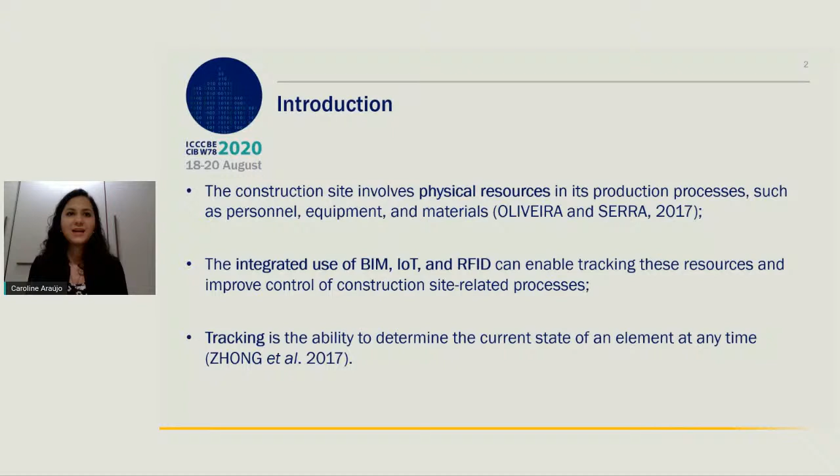The construction site involves a large number of physical resources in its production processes, such as personnel, equipment, and materials. The integrated use of BIM, IoT, and RFID technologies can enable tracking these resources and improve control at the construction site. Tracking is the ability to determine the current state of an element at any time.

Metallic formworks are relevant physical resources in the cast-in-place concrete wall constructive system, but after removal of the formworks, there are defect corrections that cause rework, delay, and quality issues. We can use technologies to control the integrity and service life of each metallic formwork and reduce these kinds of defects. So the main objective is to present a conceptual framework for tracking physical resources in construction sites using BIM, IoT, and RFID, in which the metallic formworks are the objects of study.

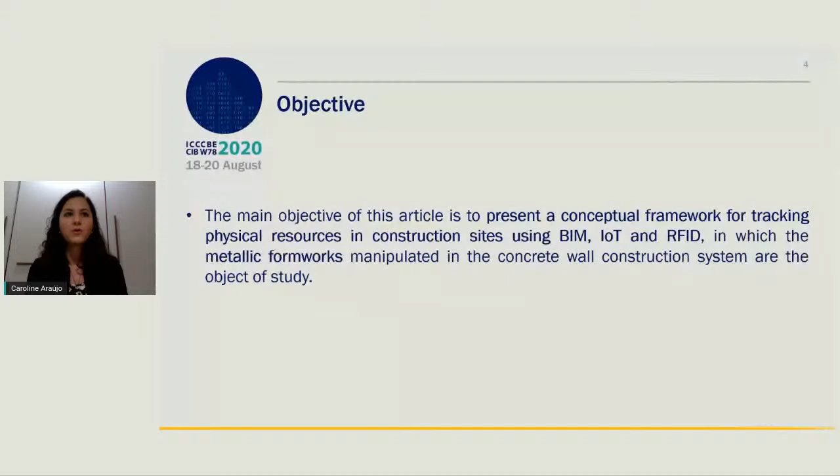This is based on the research problem: there was a lack of an integrated system for this kind of resource, a temporary resource in the construction phase.

About the technologies: Internet of Things allows communication between real and virtual devices and can detect status changes in real time. RFID is part of IoT and can identify and support a large number of unique IDs in the same environment, and the main components of RFID systems are tags, reader, and control software. About BIM, Building Information Modeling, it has the potential to become a digital twin of reality and support the tracking and monitoring of construction progress in real time, and also has cloud computing interface and other technologies.

So we did a systematic literature review to identify the main requirements to develop an integrated system with the mentioned technologies. We selected databases, defined inclusion criteria, and search terms that should be in the paper. We analyzed all available periods in the databases, just papers published in journals. For the review exclusion criteria, we excluded repeated papers and papers that didn't have BIM, IoT, and RFID as the main subject. We analyzed and discussed the results, and in the next slide I will show you the final sample.

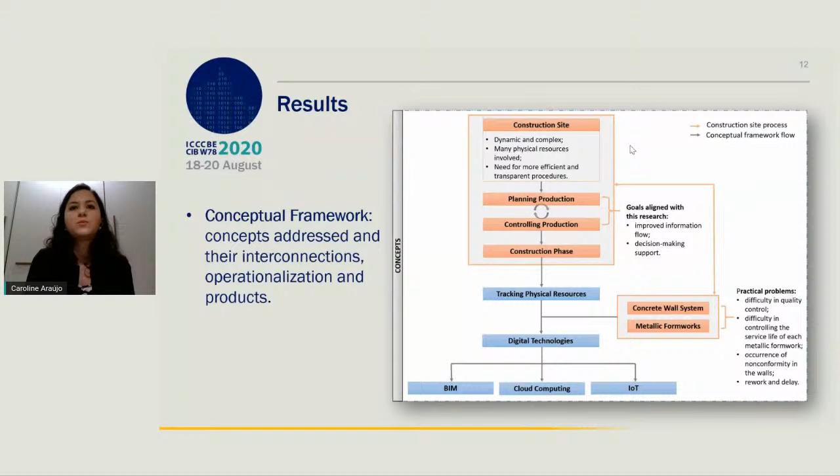Here is the first result, a conceptual framework with concepts addressed and their connections. So we have the construction site, planning and controlling production, specifically in the construction phase, and we have the concrete wall system and the metallic formwork with the practical problems. For tracking the resources, we will need the digital technologies that I mentioned.

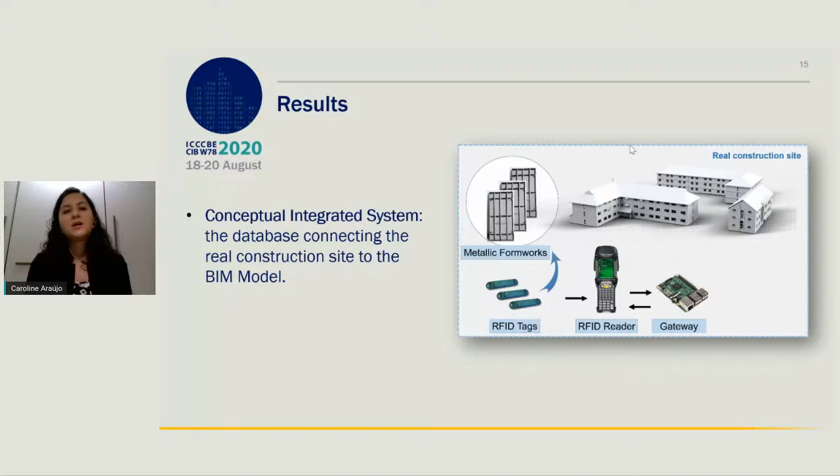There is the conceptual integrated system. So we have the real construction site. We need to put the RFID UHF tags in each metallic formwork and use the reader to capture the data, and the gateway to communicate with the reader.

and with the database, and also to generate a local network. So we have the database and we have the virtual construction site corresponding to the real construction site. The end user can use the reader and the integrated system inside a tablet, and the BIM model will be translated to the cloud to become a digital twin of the reality.

There are three modules of the system. The first module is the registration of tags and the respective formwork, and the type of information here is acquisition date, numeric identification codes, and physical aspects of the formworks, such as dimensions and weight.

The second one is the maintenance module, and it can register maintenance history records, service life forecasts, reports, and related photographic reports about this. The last module properly allows tracking and locating the formworks, and can provide support during the installation phase to verify and correct assembly problems.

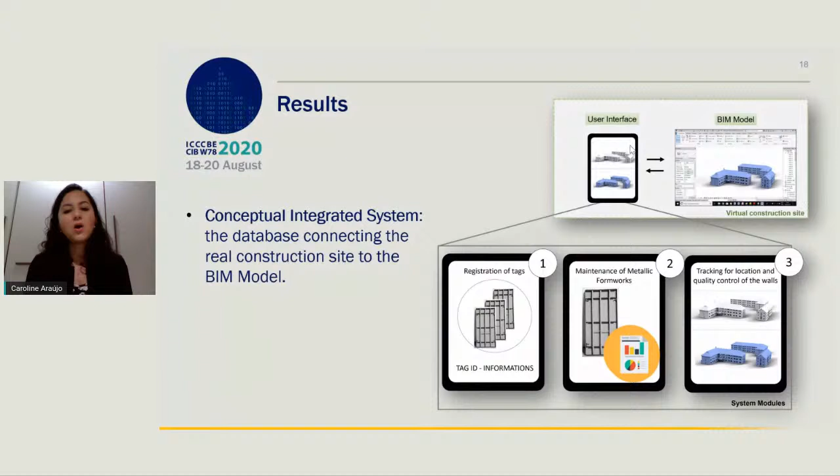But the main objective of this module is to compare the data collected about formworks with the quality of the wall generated using triangulation of all data.

There is a full view of the conceptual integrated system, and we are developing this in a real environment now with a construction company partner, applying this system based on this framework in a real environment.

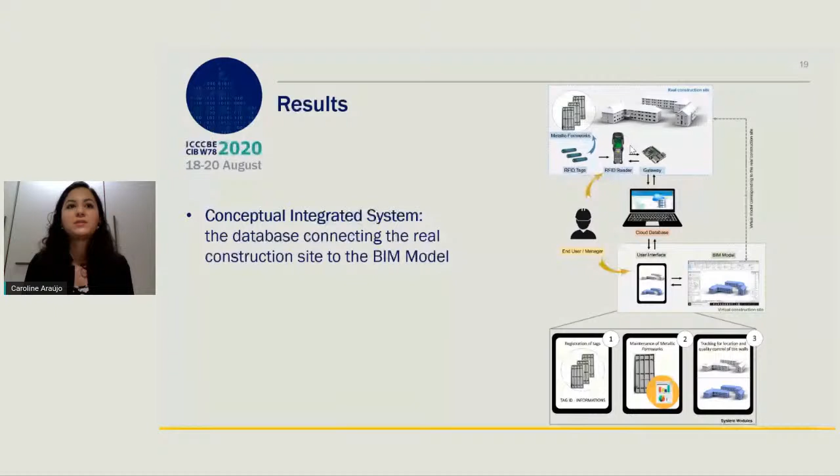The system can collect, store, manage, and display data on an integrated platform. And despite the challenge for practical implementation, the potential of integrated use of these technologies is remarkable. The system can improve the information flow on construction sites, management decision making, and promote improvement in management and quality control. Thanks for your attention.

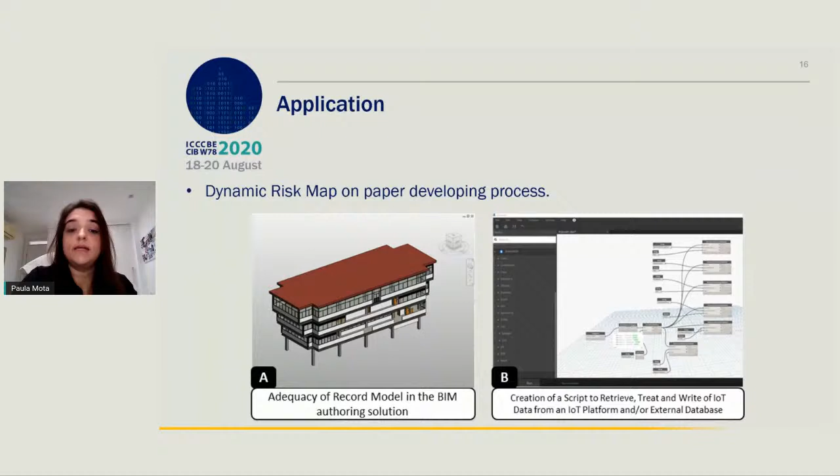For this prototype, an IoT platform database was used to record environmental data collected by a sensor network.

The adequacy of the BIM model involved the settings of shared parameters and inserting the symbolic risk object by room. The next goal was to synchronize the updated 3D view sets from the BIM author environment to the MR solution.

An MR solution is essential to share information, and the synchronizing can be user-based or through an automation program to achieve live status. The actual 3D view set with IoT and risk data was synchronized to be accessed by any mobile application.

As a result, the symbols were visualized at different scales and their IoT data consulted through the properties browser.

Regarding the degree of intensity, the higher the symbol, the greater the user risk. Besides, users can access quantitative risk information.

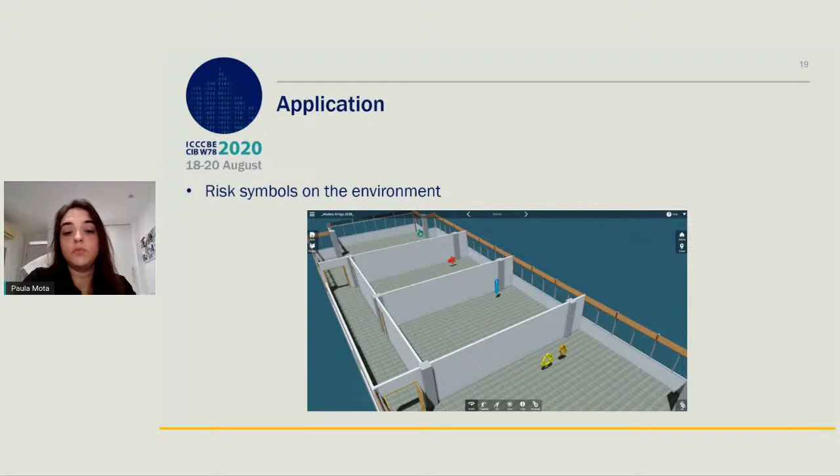So, as a conclusion, the framework developed will help the implementation of a dynamic risk map. The benefits include the knowledge of risk on site and the reduction of workplace injuries.

Future work aims at the implementation of AR sensor solutions and measuring their performance.

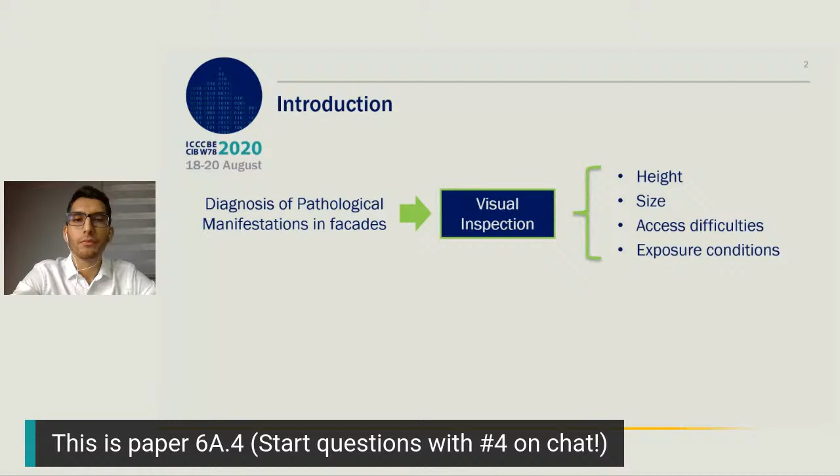In recent years, the use of deep learning techniques to detect and classify specific features in images and videos has been increasing, which when combined with the use of UAVs for collecting images, is a potential useful tool that can assist the visual inspection. This paper aimed to perform the analysis of digital image processing, DIP, for automatic detection of cracked building ceramic tiles associated with a UAV, which will potentially result in benefits like time, cost, and safety with respect to the diagnosis.

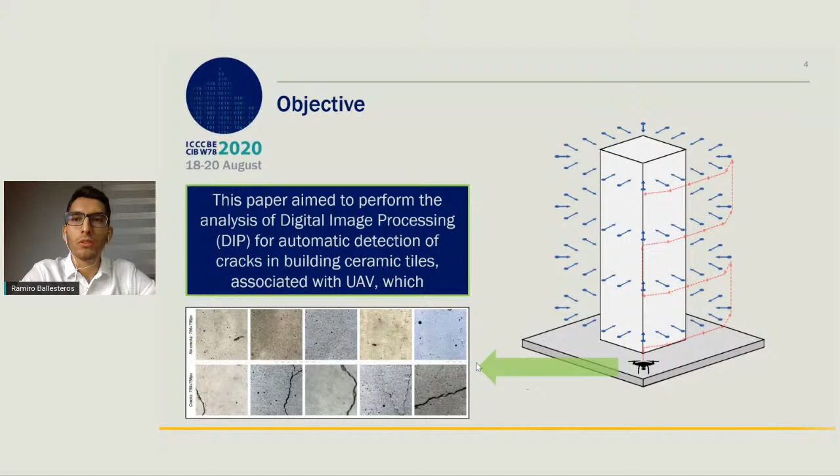For the project construction, it was necessary to separate the entire process into modules, starting with the creation of the dataset database. The data is pre-processed with DIP techniques, and finally, the deep learning training and testing stage.

With the lack of access to a public dataset for the given problem, it was necessary to create a small database, seeking to meet the minimum requirements of deep learning, even knowing that for good results, thousands of images will be needed for training.

In this way, 167 different images were collected, all showing cracks in ceramic tiles. Consecutively, the respective labels were created so that the deep learning interprets the pathological occurrence as a correct answer.

In the pre-processing step, the images were treated so that the result was as close to the labels as possible, that is, binarized, with a black background and white strokes. The binarization technique used was Otsu thresholding. Before performing it, it was necessary to apply some other techniques.

Involving lighting, morphology, and noise filters. This series of techniques made it possible to visualize the cracks in most of the images that previously presented problems.

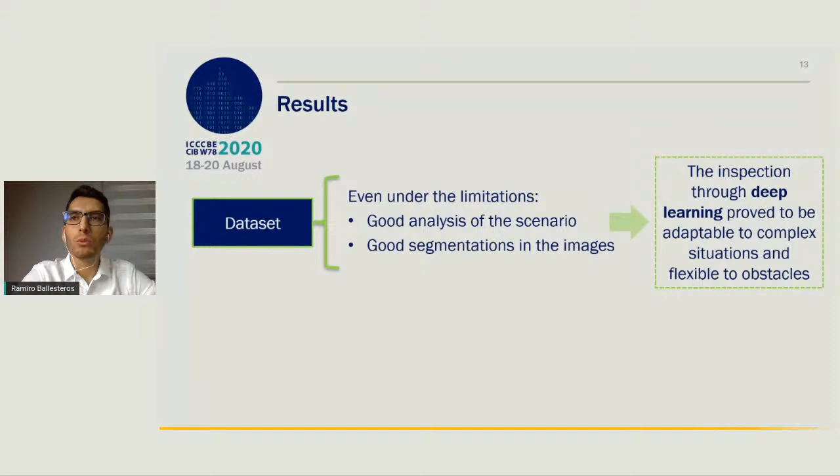The results of the study provided, even under the limitations, a good analysis of the scenario and good segmentation in the images, both images with a lot of noise, as well as those with discrete features. The inspection through deep learning proved to be adaptable to complex situations and flexible to obstacles.

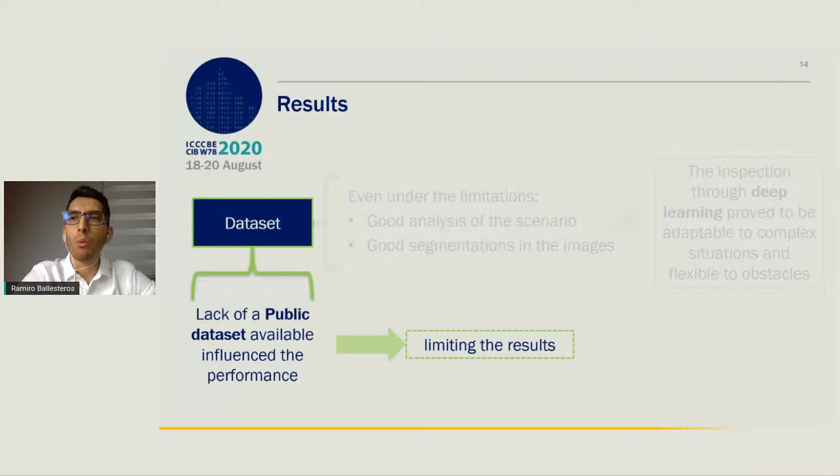However, the lack of a public dataset available for these types of problems directly influenced the performance of deep learning, limiting the results. It is important to emphasize the importance of a wide dataset to work with deep learning, with good quality and labeled images, in order to obtain better results.

Even after selecting the most relevant data to compose the dataset, in many cases there was great variation in the images, such as angulation, distance, and quality.

In addition, the preprocessing of the data also impacted some of the results, as it didn't work well on all the images in the dataset, mainly due to the variation in lighting.

The detection of cracks by DIP techniques is feasible from a technical point of view. However, it is considered a complex job when there is high variation in the study images and in a limiting scenario, such as the lack of a public dataset for the problem. The project still managed to develop a simple and efficient methodology for what was proposed.

There is a promising way to improve the project, seeking to further simplify the approach, minimizing the pre-processing step for example, and improve the accuracy of the results.

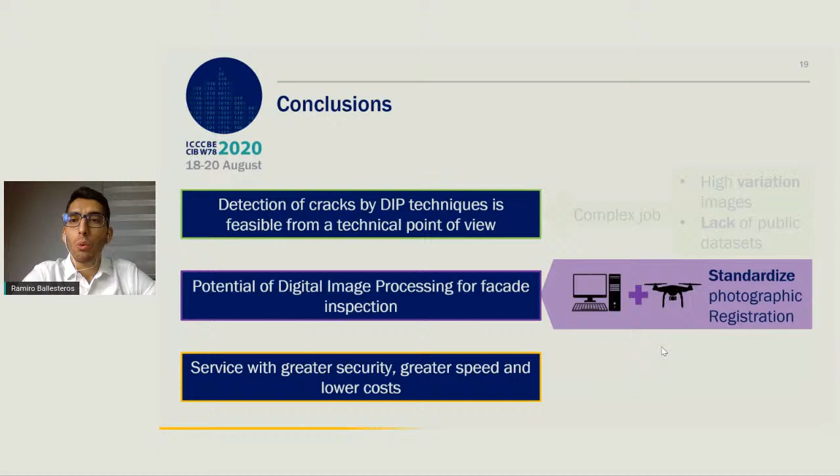In conclusion, there is sufficient evidence to emphasize the potential of digital image processing for facade inspection. This method, combined with photographs collected by UAVs, especially through collection techniques that standardize the photographic records, will provide a service with greater security, greater speed, and lower cost, requiring fewer resources compared to traditional inspection methods, such as industrial mountaineering.

In short, that is all I had to present. Thank you very much for your attention.

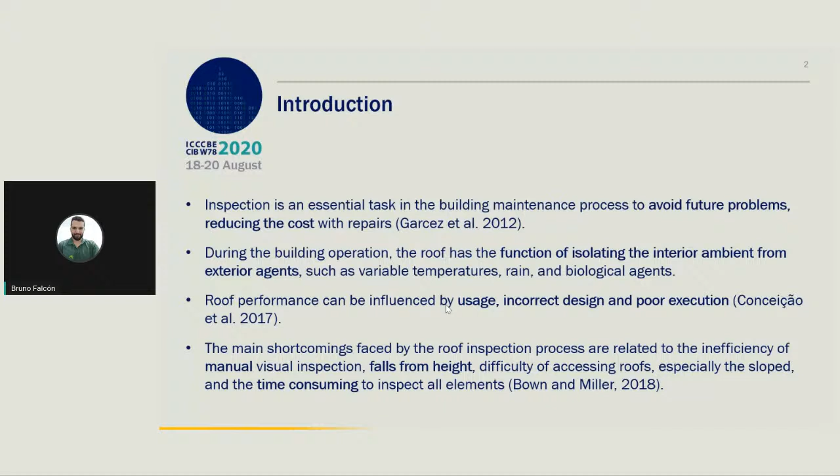Roof inspection is essential to the maintenance process of a building and can lead to fewer pathology occurrences through the identification of problems of usage, incorrect design, and poor execution. But there are two main shortcomings faced by this process: first, the inefficiency of manual inspection, and second, the time consuming nature of it.

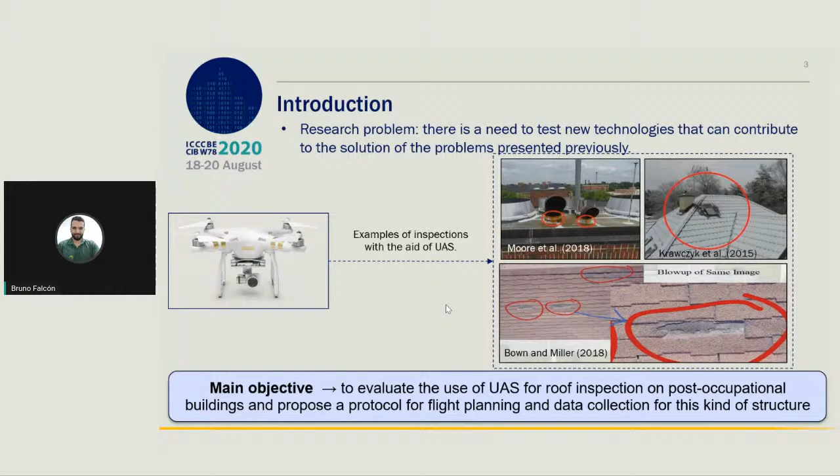Therefore, the research problem is the need to test new technologies that can contribute to solving these problems, and the main objective is to evaluate the use of UAS for roof inspections on post-occupational buildings, proposing a protocol for flight planning and data collection.

For data collection, the DJI Phantom 4 and a checklist developed with 28 items were used as tools, applied in a total of 10 projects, with 167 roofs inspected, and the average flight time was 26 minutes per project.

After the data collection, the images were analyzed, identifying the degree of conformity of the checklist items and the number of pathologies according to project delivery age. Critical pathologies were highlighted and all analysis shared with the stakeholders.

The next step was the training of the maintenance team of the company to use the UAS, and finally, the statistical data analysis and the assessment of results.

The 28 checklist items were analyzed by two aspects: visualization and nature. Visualization was divided into items visualized, non-visualized due to technology limitations, and image without sufficient detail. Nature was divided into maintenance use related items and items related to construction problems.

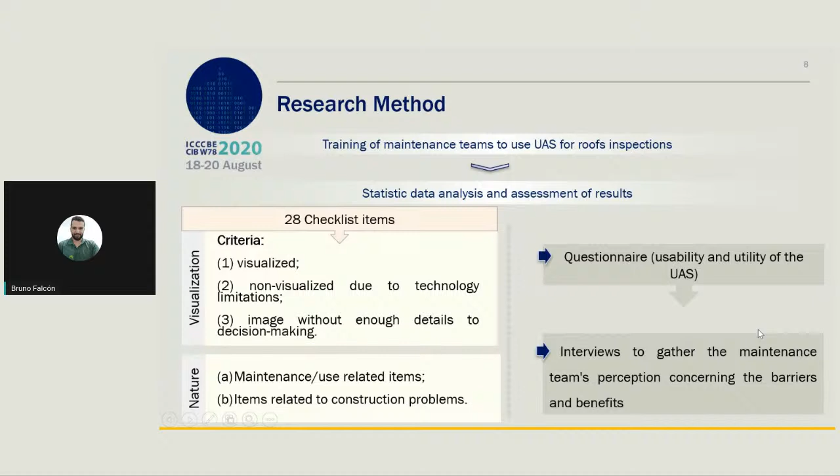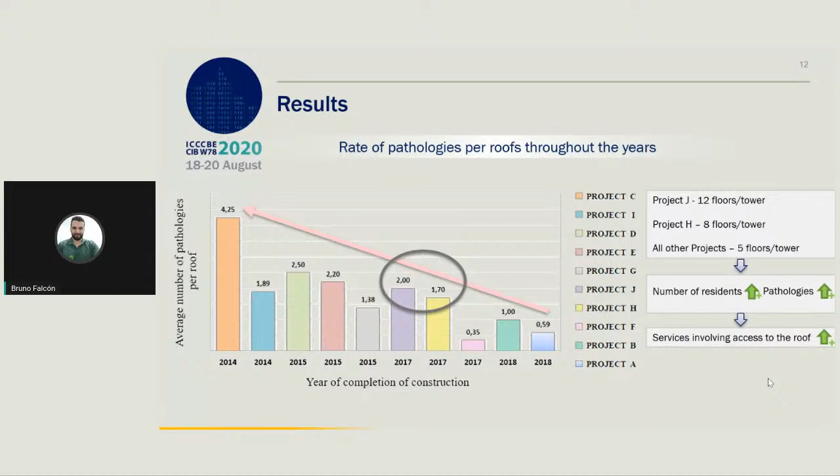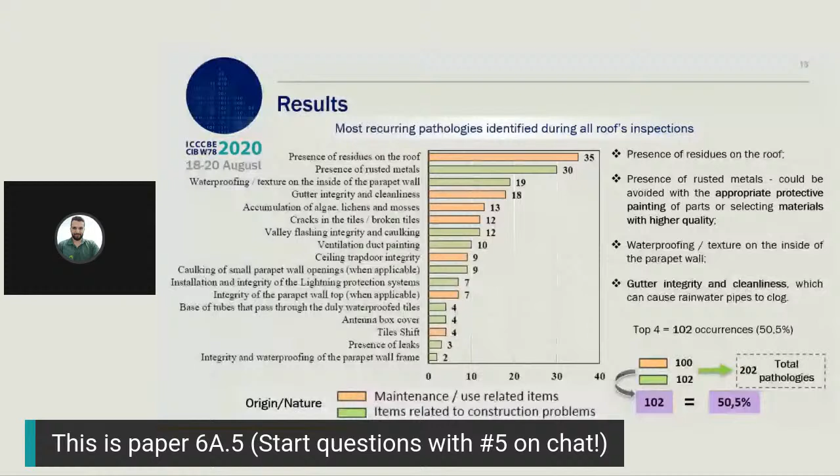This graphic ranks the most recurring pathologies identified during all roof inspections, and the top 4 were presence of residues on the roof, presence of rusted metals, failures on the waterproofing of the parapet wall, and gutter integrity and cleanliness. These top 4 together form more than half of the 202 pathologies observed.

Also, the pathologies were classified according to origin, maintenance in orange and execution in green. As an example, the top 1, residues on the roof, is of maintenance origin.

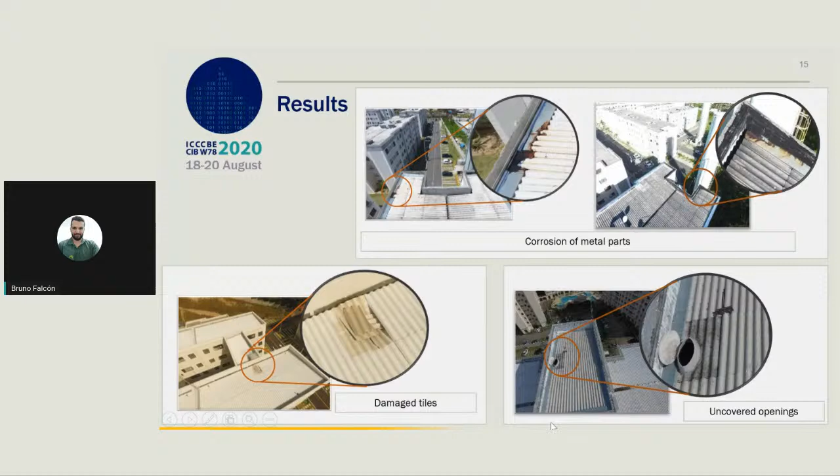The questionnaire applied to the maintenance team was ranked according to a relative importance index that you can check with more details in the full paper.

The questions applied refer to training in the inspection process with the UAS. The highest ranked items were the quality of theoretical lessons and reduction of physical effort to perform the inspection, both with maximum rate, and reduction of time spent to perform the inspection in the field with 0.98.

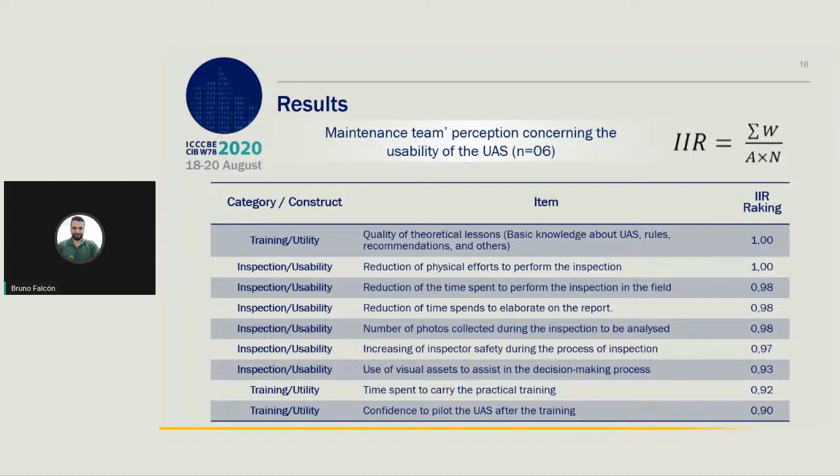As benefits regarding the use of UAS for roof inspections, we can cite greater agility in the inspection process, increased inspector safety, easy and fast access to roofs, improvement in report analysis, and good acceptance by residents.

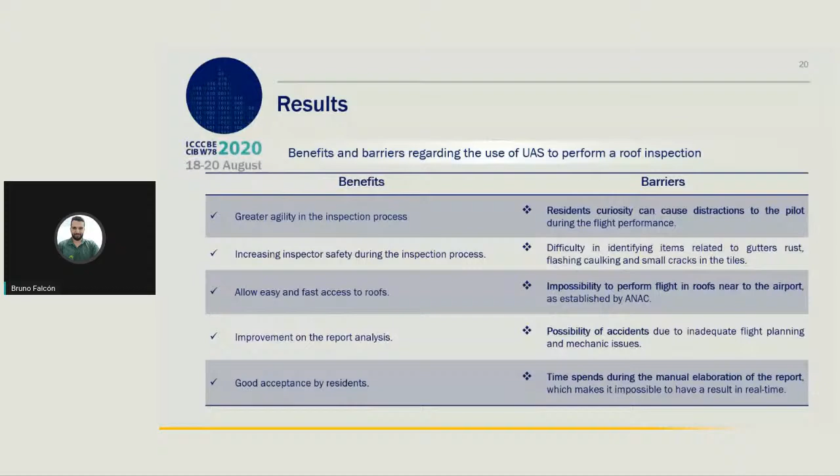As barriers, resident curiosity can cause distractions to the pilot, the impossibility to perform flights on roofs near airports, possibility of accidents due to inadequate flight planning, and the time spent during the manual elaboration of the report.

As conclusions, the findings point out the potential of the application to provide a great amount of data in a short time, allowing the visualization of pathologies in difficult areas. As further research, it is suggested to automate the report by linking in real-time the collected images with non-conforming items of the checklist. Thank you for your time and attention.

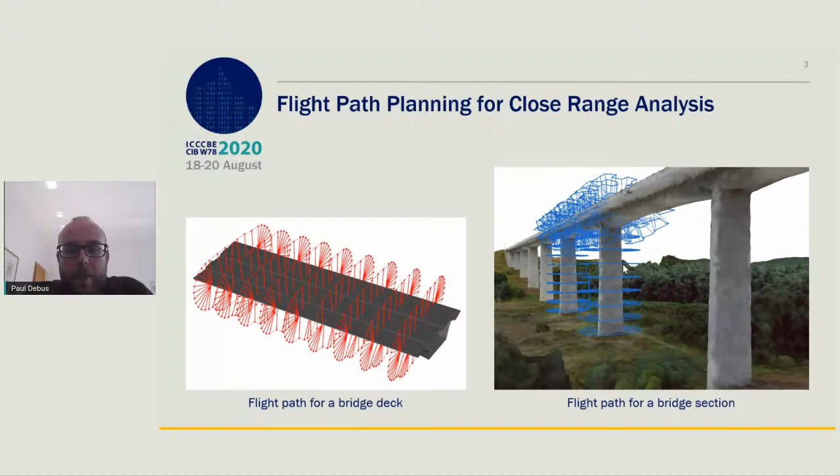For this, we need to pre-plan our flight missions. Here you can see two examples of routes we planned, one for a bridge deck and one for a section of a bridge including the piers, because human pilots are often not able to correctly steer the UAV to the height that is required.

In this paper, we propose to use a multi-scale building inspection where we define different levels of interest for different parts of the structure, between low, medium, and high, for different purposes: between just getting the rough geometry and precise crack detection at the highest resolution achievable.

For this, we plan different flight plans on rough models that already exist. Those can either be simulation models from FEM or models from previous inspections. Those models serve as the basis for the plans that orient on the geometry of the bridge that we're inspecting.

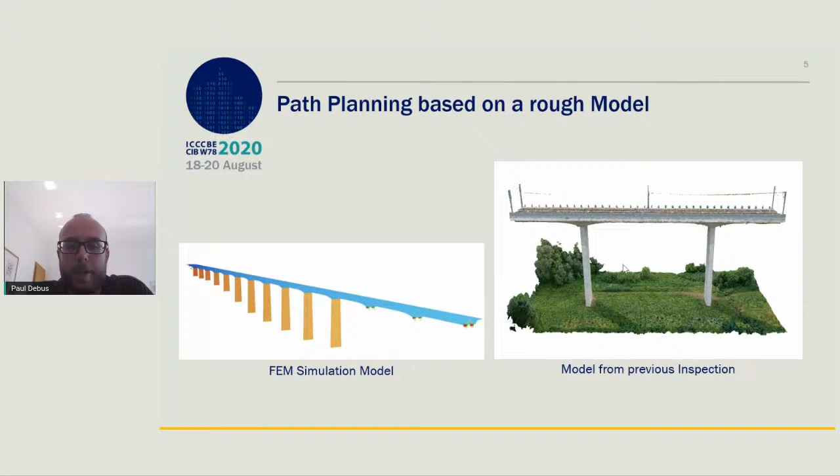The general approach for us is that we select a large set of possible viewpoints from which we select only the viewpoints that we really need. To do this, we compute a visibility matrix that contains which viewpoint can see which part of the structure, and then select from this, based on this matrix, the points.

For each triangle of the mesh that we use, we compute a viewpoint candidate that's placed directly over that triangle at a distance we computed between 22 and 1 meters, corresponding to the interest level.

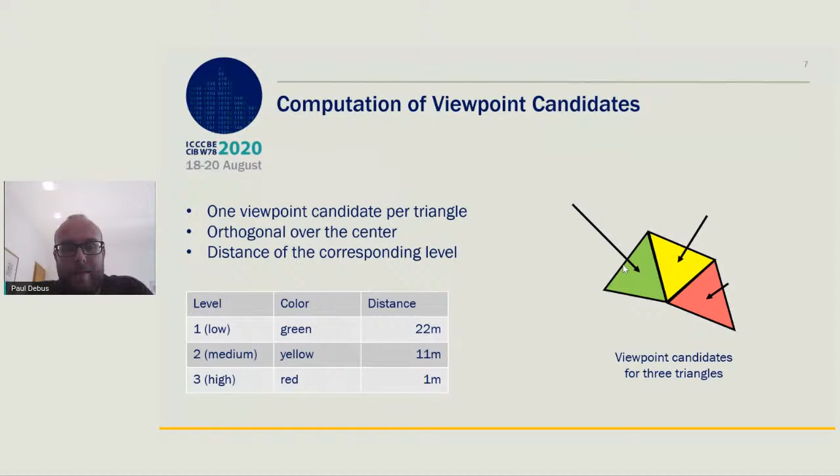So we have to choose from all those available viewpoints those that are required, because each viewpoint contains more than one triangle, so not all of them are required. And then we can compute this visibility matrix.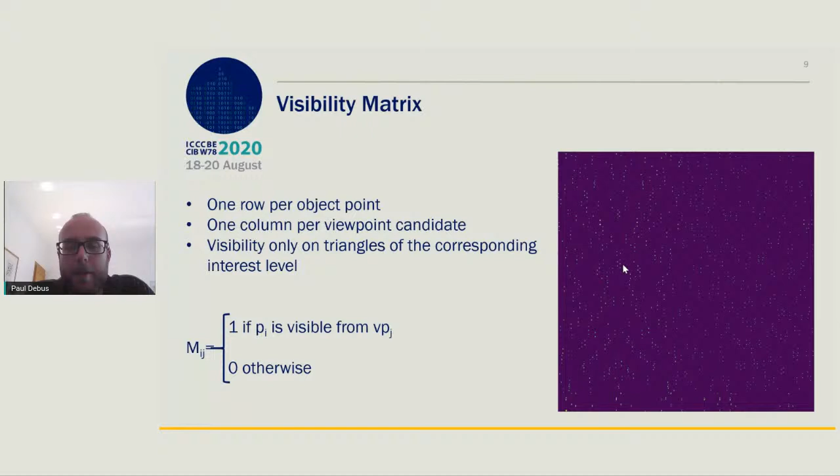Then we have the set multicover problem: select the minimum number of viewpoints such that all object points are contained in at least n sets. For structure from motion, the 3D reconstruction, we chose n to be 3, so we have some robustness against errors and possibly bad images in the coverage.

We start by fixing the columns that are required for the coverage, check if all object points are sufficiently covered, and while they are not, we select columns according to their value until all object points are sufficiently covered, and then export the final flight path to the UAV.

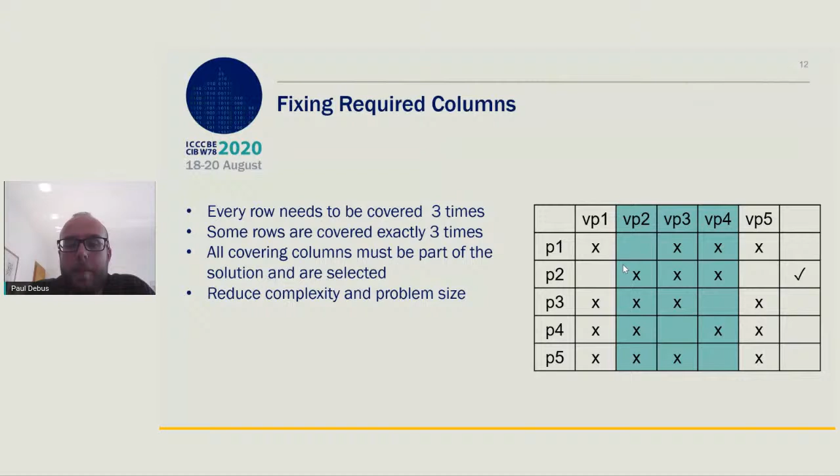Fixing the required columns means that if an object point is only visible in 3 images, as seen here with P2, then we have to select all those viewpoints that contain that point. We reduce the complexity and size of the optimization problem in this case, which helps speed things up because it's an NP-hard problem that can take a lot of time to approximate.

We compute the value for each viewpoint, which is the number of object points not yet covered that would be covered by that viewpoint. For example, here viewpoint 3 has a value of 4. It's higher than viewpoint 4 and is therefore selected. So in the next step, we have an updated value matrix that shows we still need viewpoint 4.

We applied this method to a bridge near our university, the Gänsebachtal Bridge, which is relatively new and integral, with stiff connections between the piers and the bridge deck. Due to this stiff connection, there are already visible damages and cracks in the piers that we were inspecting.

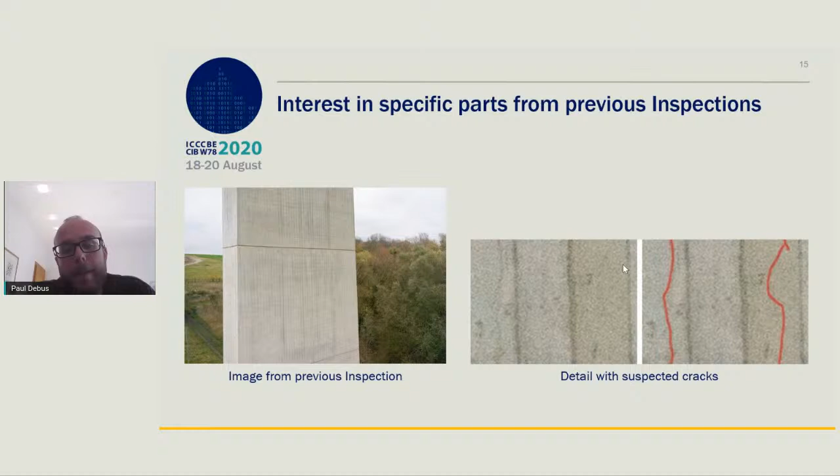On the left, you see a picture we took in a previous inspection, and we applied a machine learning-based crack detection method to these images. On the right, you can see a detail of that image and 2 detections where we suspect there could be a crack.

This suspicion we want to prove, if it's relevant for the stability of the bridge. Therefore, we put an interest level on each part of the bridge: the part contained in the image is the highest interest level, the rest of the pier is medium interest level, and the entire section of the bridge is only low interest level, because we're not suspecting cracks there, but we need it for the complete context of our reconstruction and for completeness.

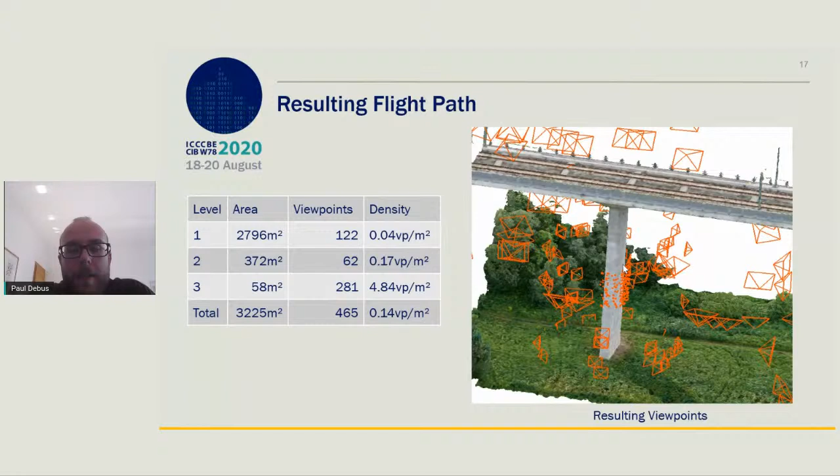From this, we can compute a flight path, shown here on the right, where we have in total 465 viewpoints. We have the important region in high resolution with around 5 viewpoints per square meter, whereas for the low part we only have 0.04 viewpoints per square meter.

So in conclusion, these multi-scale flight plans can help acquire the information we need to maintain our bridges. They can support experts in the inspection and can be the base for a digital maintenance strategy for our infrastructure in extending the service life.

For the future, we want to work on this further. We want to include constraints that improve the reconstruction possible from the images. We want to include the flight properties, and of course there's always a chance to improve the algorithms we use, a better solver for the optimization problem with better results and better performance. Thank you for your time.

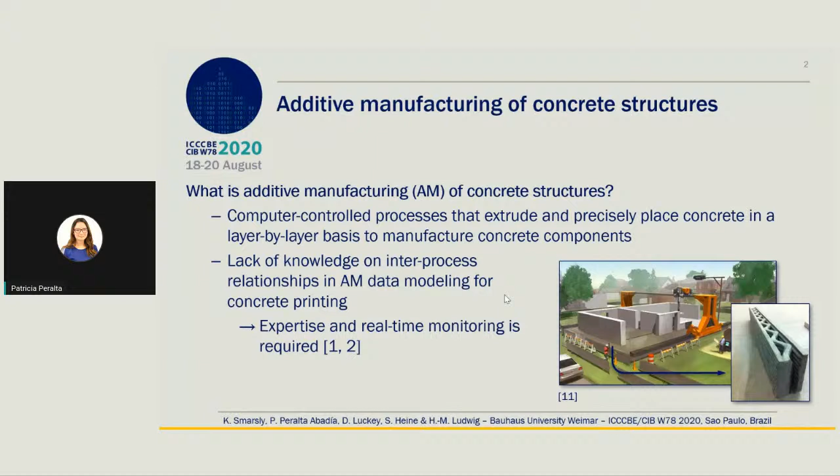There is a lack of knowledge on inter-process relationships in concrete printing. Therefore, expertise and real-time monitoring is required. Also, conventional AM data modeling approaches are implemented for concrete printing.

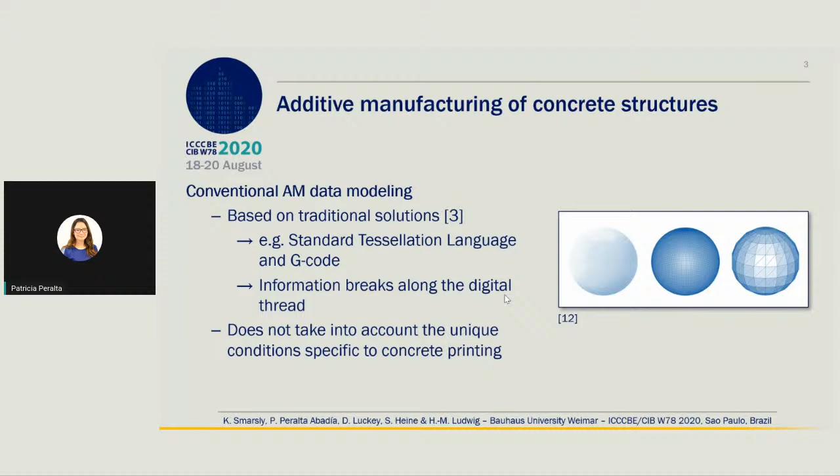Conventional AM data modeling is based on traditional solutions such as standard tessellation language together with G-code. There are information breaks along the digital thread, and unique conditions specific for concrete printing are not taken into account. New data modeling models are required to allow standardization of the data triplets, such as process information, material information,

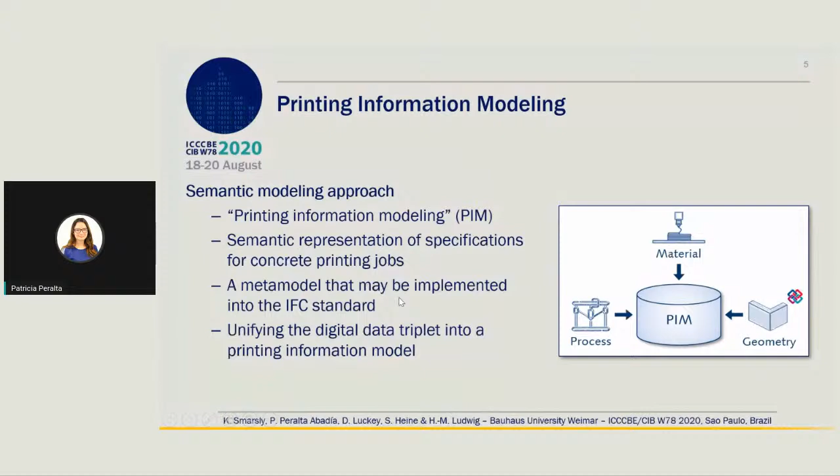and geometry information. Therefore, we develop a semantic modeling approach called printing information modeling, or PIM. The approach is a semantic representation of specifications for concrete printing jobs in the shape of a meta model. It may be implemented into the IFC standard, unifying the data triplet into a printing information model.

In literature, parameters and interprocess relationships have been documented and may be characterized according to the data triplet. For process parameters, we have hardware-related parameters in components such as pump system and printhead, and manufacturing-related parameters in components such as filament and toolpath.

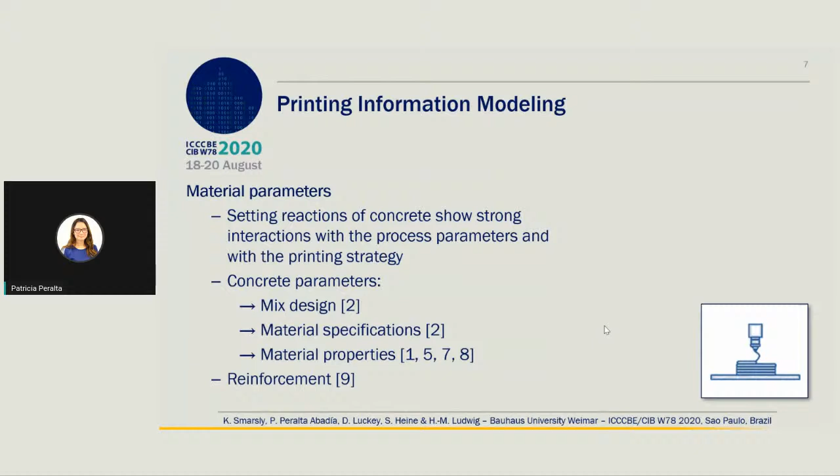For the material parameters, we have that the setting reactions of concrete show strong interactions with process parameters and with the specific printing strategy. The concrete parameters include mix design, material specifications, and material properties. Regarding the reinforcement, it is dependent on the concrete printing method used.

The geometry parameters may be inherited from the BIM models, such as dimensions, point definitions, and geometric objects and their representations. Also, there are geometric parameters related to the additive manufacturing process, such as the contour lines, the results from the slicing processes.

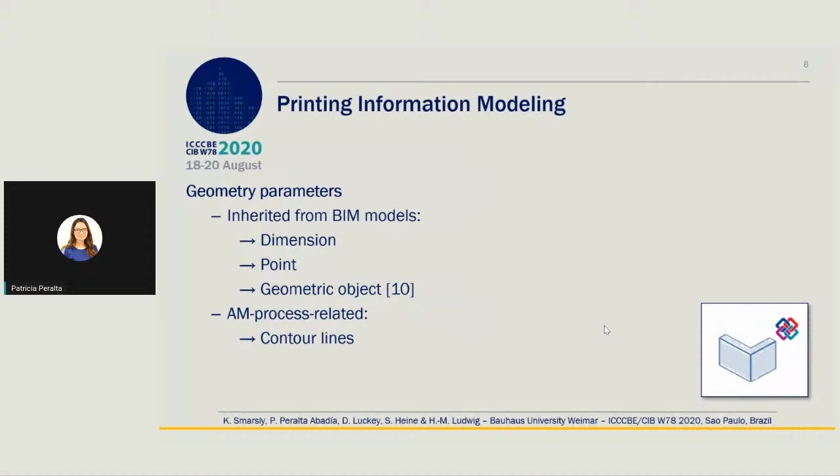A meta model is then developed, the printing information model or the PIM model. The parameters are grouped into classes, and the interprocess relationships are represented with associations, dependencies, and generalizations. The meta model is comprised by process information, material information, and geometry information.

For example, if we focus on the toolpath data, we can observe that it's a subclass of process information. It uses contour lines to define a path. Likewise, while defining the path, it also uses fresh state properties of the concrete data and filament data to ensure the geometric precision and the buildability of the concrete structure.

Later, the motion data follows the path stored in the toolpath data. In this way, concrete printing job specifications may be semantically represented and then may be used for developing new or expanding existing standards or software applications.

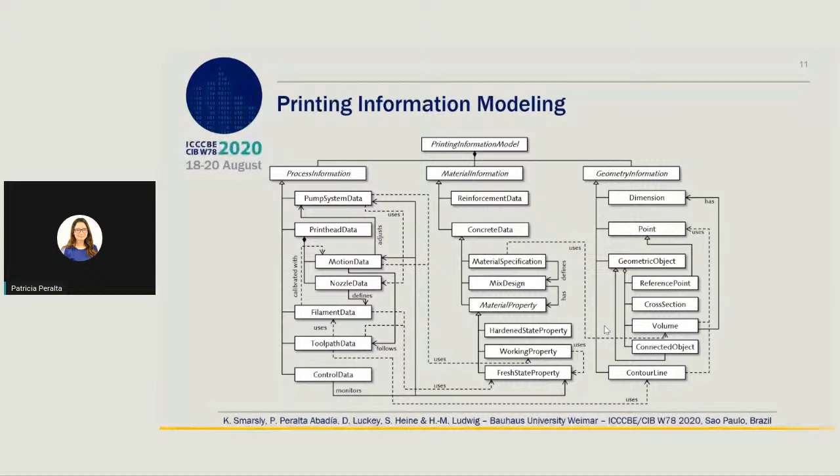Using the PIM model as basis, we develop a BIM approach towards concrete printing, incorporating the data triplet into a single data model. We developed the PIM test application, which implements the PIM model using IFC models as inputs and generates CNC code as output.

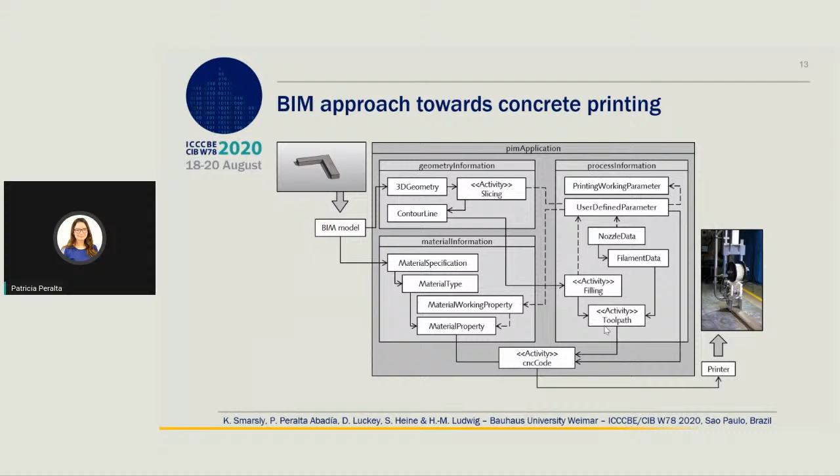First, using IFC models as inputs, the 3D geometry and the material specifications are extracted. The PIM test application then incorporates the process parameters and the material properties specific for a concrete printer and a concrete mix. And finally, CNC code is generated as output and transferred to the printer.

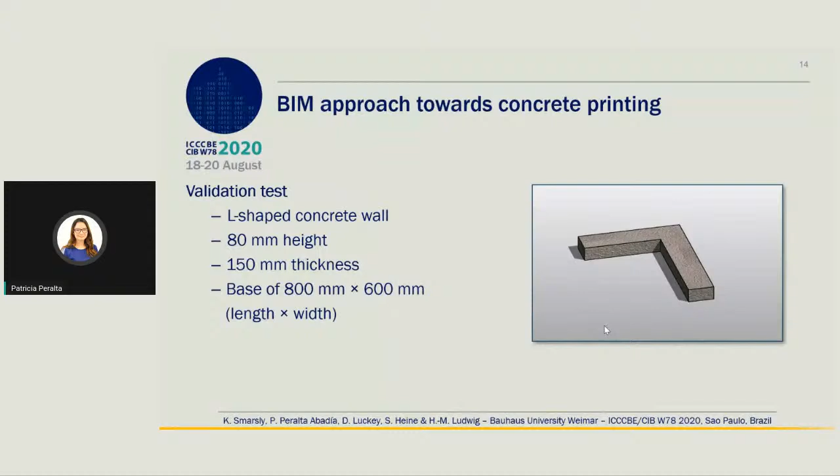The BIM approach is validated with an L-shaped concrete wall that is designed in a BIM tool and exported as an IFC file. A concrete with 30 megapascals design strength is specified as the material, and it has an 80 millimeter height and 150 millimeter thickness.

The validation test is carried out using a gantry printer. The printer uses a custom concrete mix of 30 megapascals. And for the printing test, a printing speed of 100 millimeters per second, a pump pressure of 1 megapascal, and a layer height of 40 millimeters is defined. And a unidirectional printing strategy is implemented.

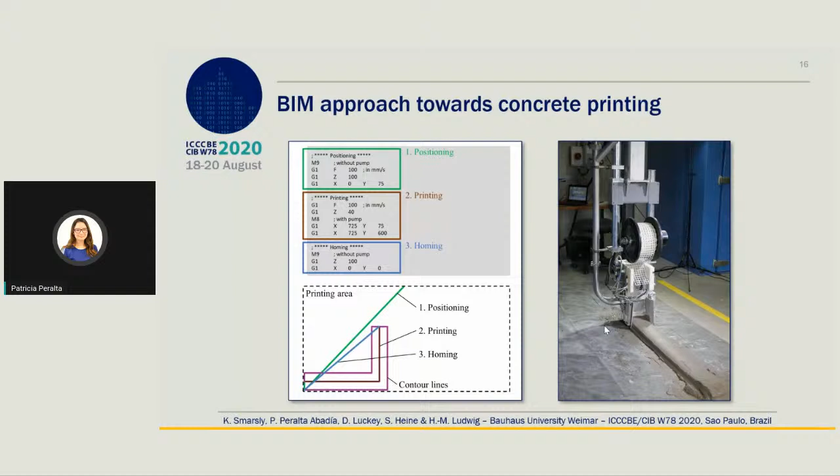As a result, a CNC code is obtained, as well as a visualization of the toolpath, as shown in the figure. The toolpath visualization allows evaluation of the geometric precision and the CNC code generated by the PIM test application. The CNC code is then read by the concrete printer for a printing test.

As a conclusion, we have shown that the PIM model semantically describes the AM digital triplet, facilitating instantiable models for BIM-based concrete printing. The PIM model is the first step towards standardizing the digital data triplet. Also, the application uses BIM models as input source to generate CNC codes.

As future work, further studies may focus on optimizing AM algorithms for calculating toolpaths and on incorporating sensor data for processing, monitoring, and real-time printing adjustments. Additionally, in the future, the IFC schema may be extended to support process parameters and material parameters.

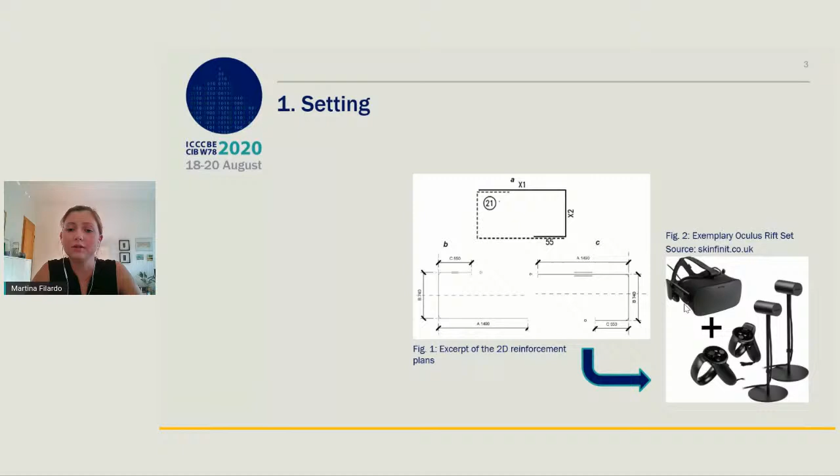The created workflow started with modeling the pillar based on the mentioned drawing set. The 3D BIM model included parametric editing and distribution. To create a 4D model, we took the sequencing reference from a Gantt diagram based on standard scheduling tables used widely in Germany.

This was used to create an animation based on the modeled rebars, which were divided into sets and included their direction. Subsequently, we created a project in a game engine with the objects and imported the mentioned animations. We used Lua scripts to communicate with the HMD and flow nodes for the user interaction.

Mainly, we used Autodesk Revit for modeling, 3ds Max for animation, and 3ds Max Interactive for the game engine, and the mentioned Lua scripts and flow nodes for the VR implementation. Of course, we also used the Oculus application. The used software was mostly Autodesk-based, so compatibility was not an issue.

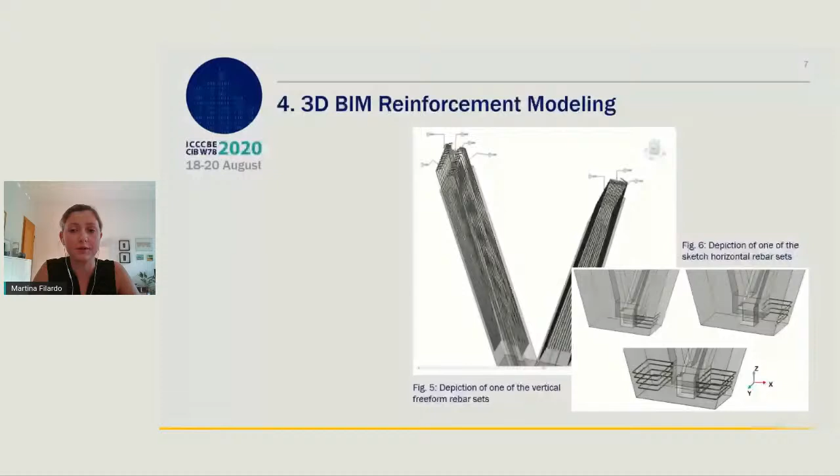While modeling, we also set the material properties. Also, the number of rebars in each set varies according to the type of rebar and their position. These rebar sets play a very important role in the next steps, since the sequencing and animation clips are based on them.

An often mentioned pro of using the BIM method is the additional visual examination of the model. This visual examination was also needed in this project in order to correctly model it. We ended up noticing missing information in the 2D drawing set, which would otherwise just be noticed on the construction site.

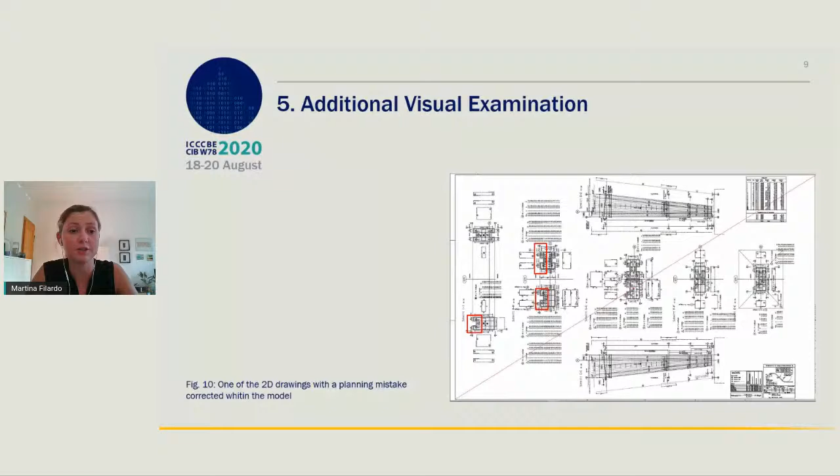Our next step regards the rebar scheduling. For this, we created the mentioned Gantt diagram for each rebar set, based on scheduling tables used widely in Germany since the 80s, thus creating a 4D model.

The sequence starts at the bottom and moves up, and after assigning the sequence to each rebar set, the color-coded model on the right side was created.

The sequence of rebar sets is the basis for creating the animations, which result in the visualization of the installation process. To create these animations, we still need one piece of information: the direction from which the rebar sets and subsets move into their final position.

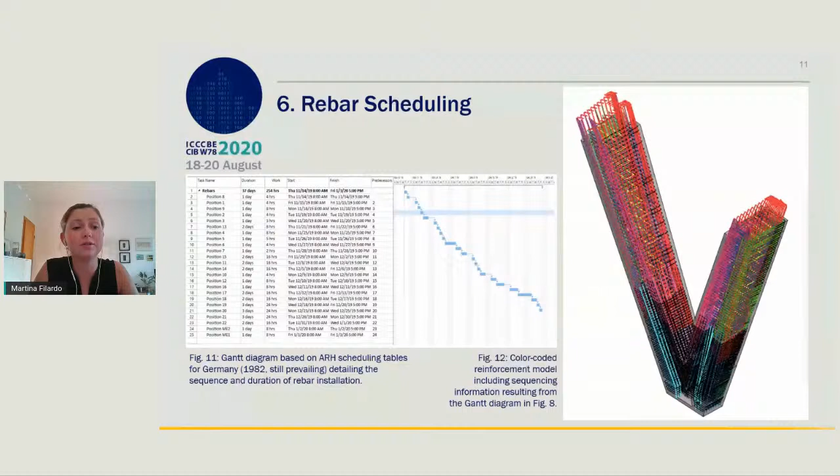For this, we animated the movement backwards, starting at the final position, then inverted them to the final position so it becomes the final position in the animation as well. This way, we always just needed to change the value of one axis, either positive or negative. After assigning directions to each rebar manually, we divided the animation sequences into equal frames and clips for each rebar set.

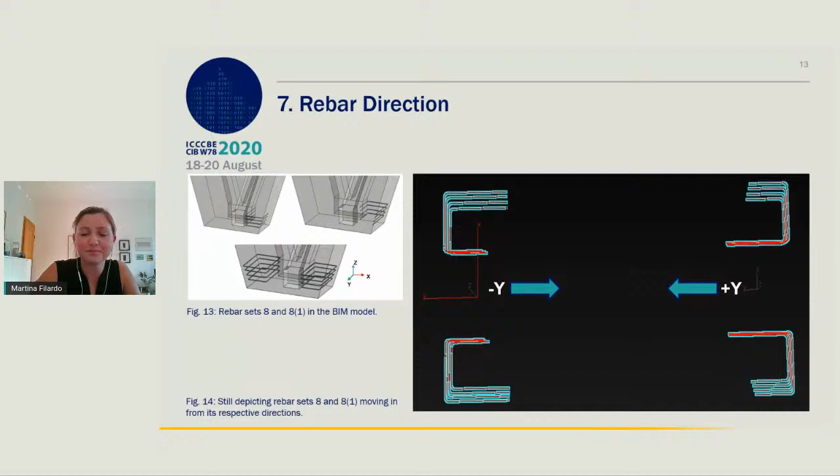This is important for the play and pause options later on. All the rebar sets move directly into their final positions from either the X, Y, or Z direction, positive or negative. Side note: since this is a 2.5D object, sets cannot move from the negative Z direction since there is terrain there.

Next step is implementation in the game engine. For this, we used, as previously mentioned, the 3ds Max Interactive application, which uses the Autodesk Stingray engine at its core. We started with a basic project and imported the rebar layout model as well as the animation clips, placing them in one scene on a single level. 3ds Max Interactive has an integrated Lua app kit.

With this, we were able to visualize the movement of the rebar sets in the defined sequence within the VR environment through the Oculus Rift equipment. Examples of rebars moving in from each direction—positive and negative X and Y, and positive Z—into their final positions can be seen on this slide.

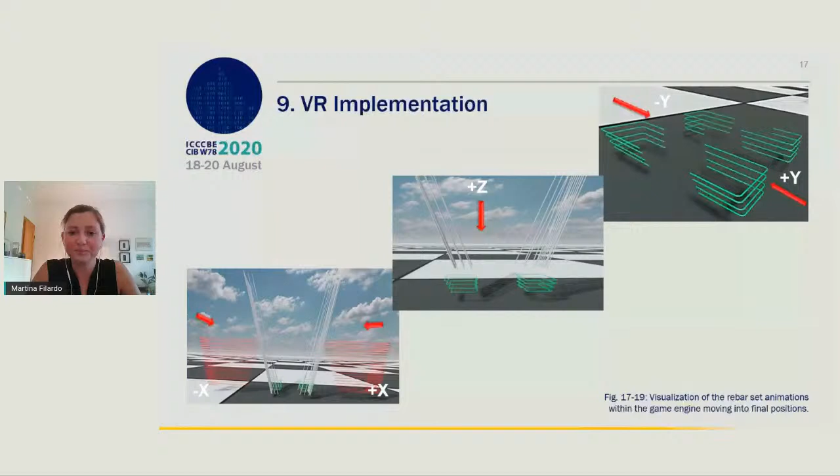However, a key component of virtual reality is user interaction. In addition to moving around the model in the scene, we implemented user interaction through flow nodes with actions like play and pause, triggered by buttons on the virtual hand controllers connected to the animation clips and enabled by the Project Lua script.

And with this, we arrive at our conclusion. We were able to achieve a VR-based visualization of reinforcement installations through many steps and different software applications, which was expected given that there are not many interfaces or overlaps between BIM and VR software, so changes in the reinforcement layout require redoing almost all steps.

We also found that modeling and programming skills are of vital importance for this task, which needs to be considered when educating professionals. The used hardware is compatible with German construction sites to a certain degree. If used commercially, the licenses of the many software applications used can become pricey. That was it—I hope you could understand what we did, and thank you for your attention.

Obrigado. Thank you very much, Martina. We definitely understood. Thank you very much. A very good presentation.

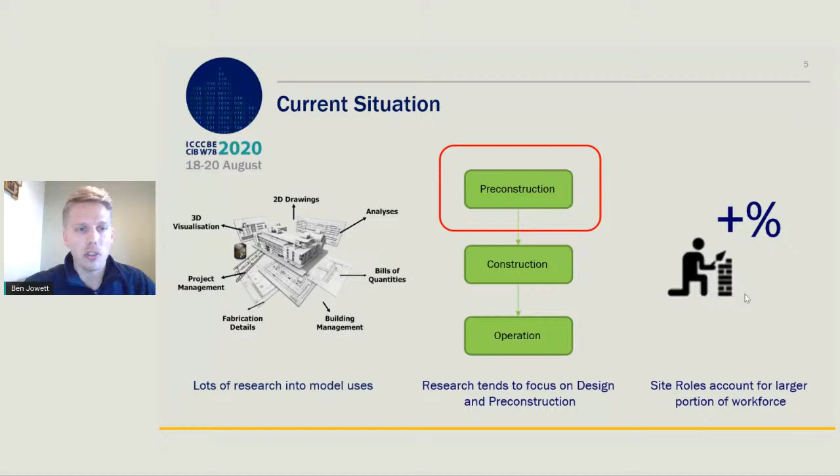There's obviously a lot of research into various different model uses, but a lot of those tend to focus on the pre-construction period rather than during construction or operation. Equally, the percentage of the workforce that works on site accounts for a much larger portion than office-based roles.

This leads us to mobile BIM technologies and field BIM still not being widely discussed, with a lot of interchangeable terms used, such as field BIM, site BIM, cloud BIM, mobile BIM. A key piece of this work is to distinguish what those terms mean and to distinguish between mobile BIM technology and field BIM. There are some early studies investigating the benefits of field BIM, with an emphasis on the importance of cloud technology and the security underpinning that.

However, some studies have shown that the percentage of apps that facilitate model access is low.

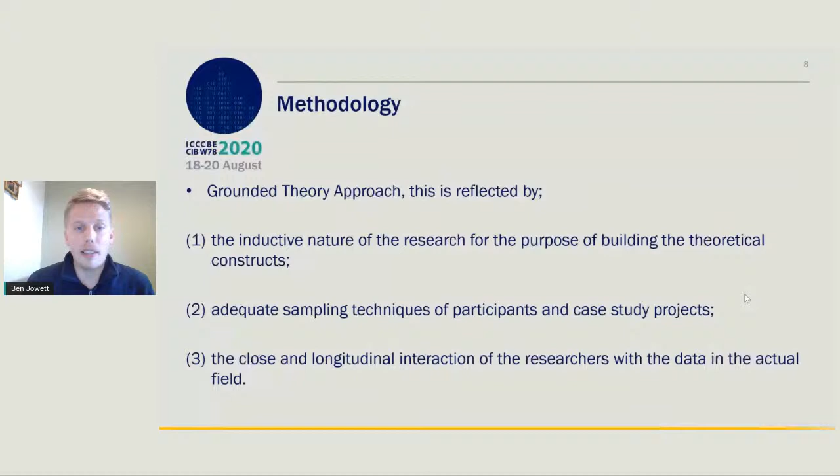The methodology is a grounded theory approach, an inductive study where we're looking to build theoretical constructs using adequate sampling techniques of participants and case study projects, through a longitudinal case study.

Several research methods were used: a case study project which consisted of a launch workshop with the project managers, a survey at the end of the project after one year, and an independent expert review of the platforms used, external to the case study project. We also undertook a focus group with experts to identify business-level requirements, not just project-level, and a survey of the industry to understand how it's been used. However, this paper only reports on the first two methods, so we'll look to expand that in future work.

The case study project used federated 3D geometrical models during design and construction. It used a field BIM solution with associated workflows, adhering to level 2 BIM under PAS 1192 Part 2, the older standards, and adopting non-proprietary data formats. The launch workshop was undertaken with 10 site managers on site.

They had no prior experience of mobile BIM technologies, and the launch workshop was undertaken during RIBA stage 4, the technical design stage, which overlaps with construction.

The outcomes of that workshop to understand the team's requirements included the ability to produce digital forms and tasks, the ability to view 2D and 3D on site and compare with the real world, view various document types such as PDF, and support by both iOS and Android.

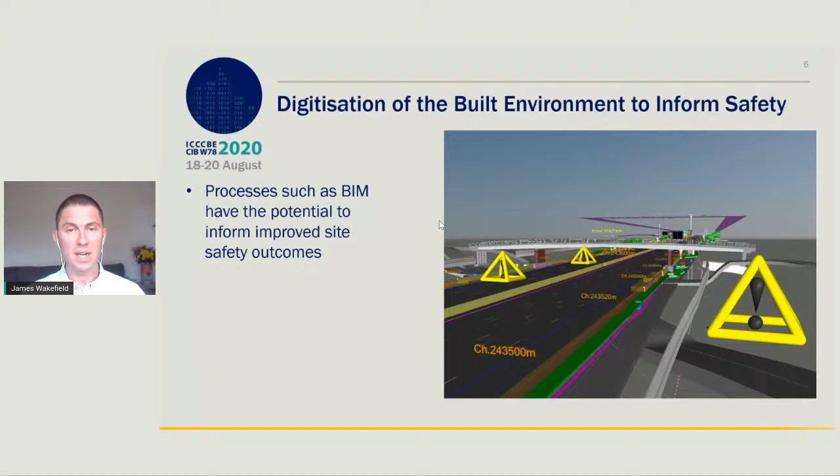We can see that the digitization of the built environment has the potential to inform safety. In fact, the PAS 1192-6 standard, which is the current standard, currently being updated, shows how we can recognize health and safety issues in environments such as BIM, or processes such as BIM, I should say.

My specific area of focus is on individualized training experiences that are powered by those digitized built environments, meaning that people who come to service them can have more engaging, more relevant, more appropriate, and more timely training.

As I mentioned previously, when you implement new technology, this is a test, by the way, scheduled to be rolled out across the UK over the next decade. This test is currently running for approximately 12,000 people using the campus daily. And with that new technology comes new risk.

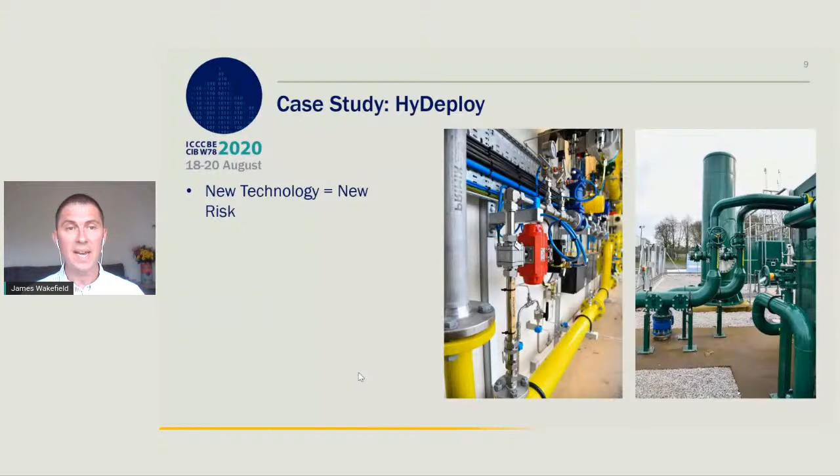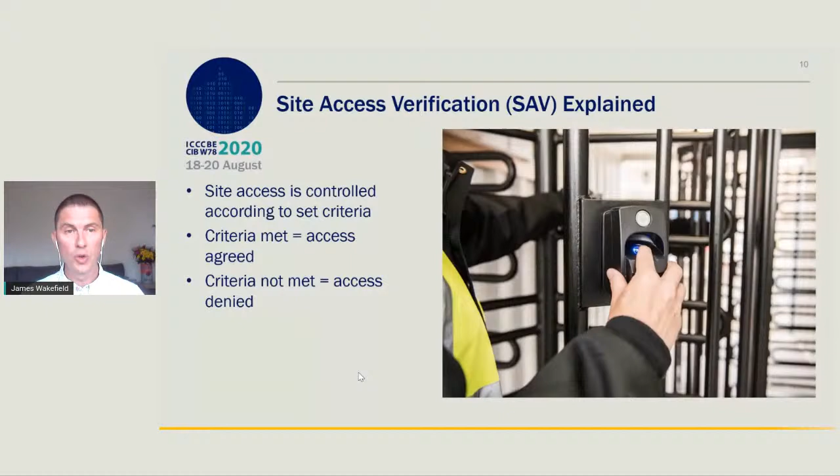That means that the operatives responsible, via the network provider, a company called Cadent, for maintaining the environment, are, when they come to Keele University, dealing with new risk. And that means that at Keele University, we have to control contractor access to the site in some other way. We have to add new elements of control which ensure that those coming onto this site to service it understand what the new risk is in this decarbonisation project.

In order to develop this research, we had a three-stage qualitative content analysis. Basically what we were looking to do was look at the situation pre-HyDeploy. What were the arrangements for site access verification pre-HyDeploy? What are those arrangements now that we have HyDeploy in place? And what might those arrangements look like with our proposed solution for improved site access verification?

Basically, the process pre-HyDeploy was general, largely static site access verification control. You had a small handful of credentials that needed to be met. If you met those, you could come on site.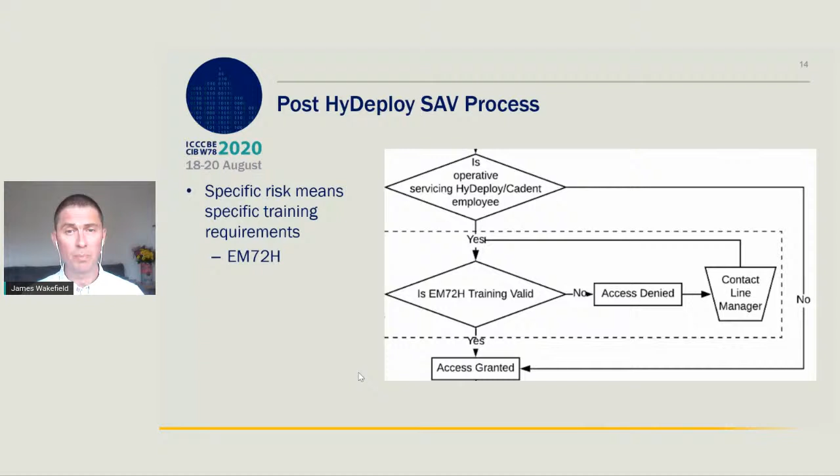Once HyDeploy was rolled out, and as I said, when HyDeploy is rolled out we get new risk, Keele University, as the estate operator, had to go ahead and implement some new form of training into their site access verification to make sure that those coming on site are able to be compliant.

What we proposed is that we would like to introduce a dynamic process to ensure that the most relevant information was available to the contractors coming on site at the point when they most needed it, i.e. just before coming onto site. What we found was that the current process does ensure that operatives are access verified.

However, the feedback from the two key stakeholders—one expert from the Keele estate and one from Cadent, the network provider—suggested that their confidence in the compliance of their operatives, and their ability to be safe when working with this HyDeploy network where 20% hydrogen was present, was increased. What they identified as potential downsides were that the way we were proposing to communicate these micro credentials ahead of contractors coming on site meant that a lack of face-to-face training could alienate some stakeholders, and also that e-learning can be frustrating.

I think everybody that's online now will attest to that. E-learning can be frustrating at times.

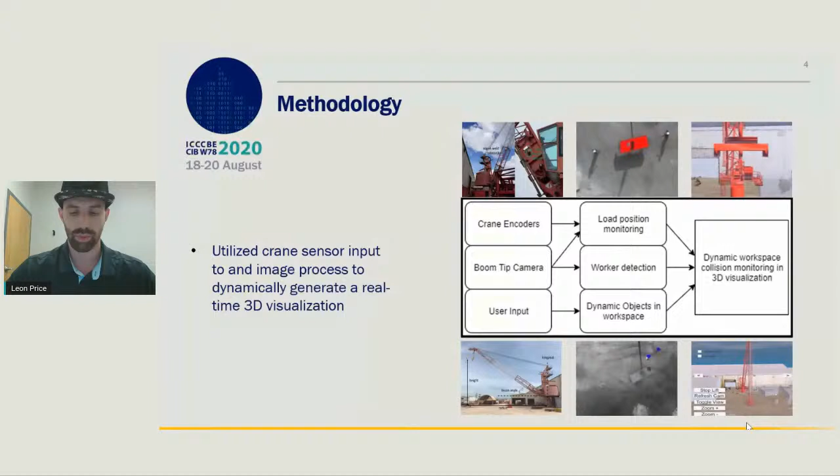To assist in the blind lift, we developed a system that takes input from the crane encoders, a boom tip camera, and the operator themselves. These inputs give us the ability to monitor the load position, detect workers, and update the environment online, which is then graphically displayed.

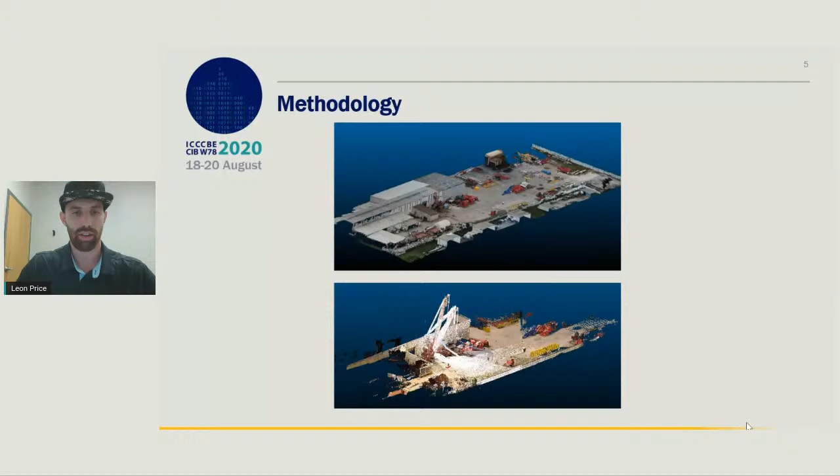The first step in building this out is to model the environment we're going to be working in. To do this, we captured two point clouds—one using a drone and photogrammetry, shown at the top here, and another using a terrestrial laser scanner—which allows us to model the environment as well as the crane itself.

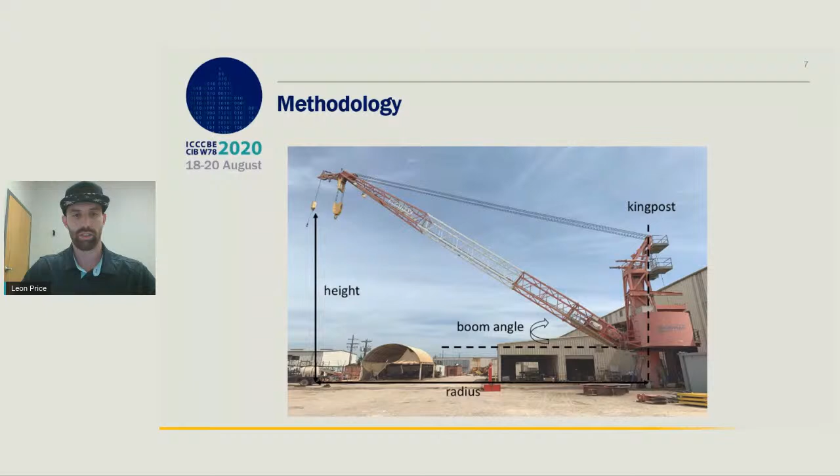Here we further highlight the key geometries and references we use to build this visualization. It's very important that we have the height and radius of the boom tip so we can accurately monitor the load position, and the boom angle has a primary impact on this.

In addition to clearly defining the geometries in the environment, we also enclose the static obstacles with a 3D bounding box in our visualization, adding some offset. So when the load comes into close proximity, we're able to send a visual and audio alert to the worker.

So I'll pass it off to Jingdao. Are you here?

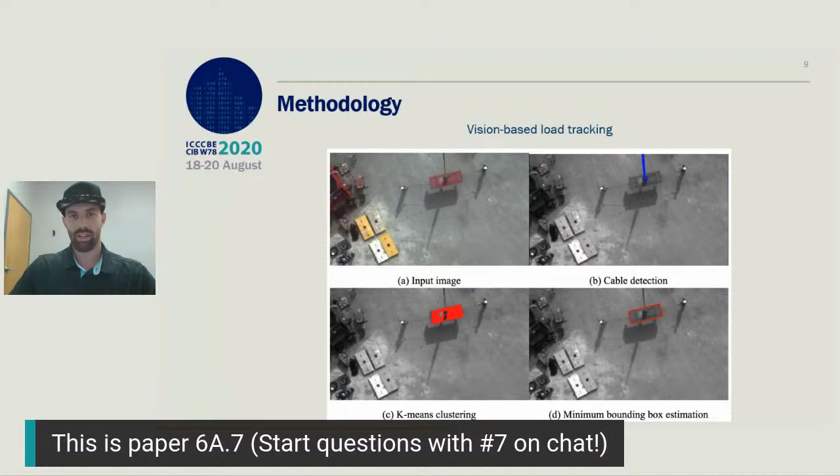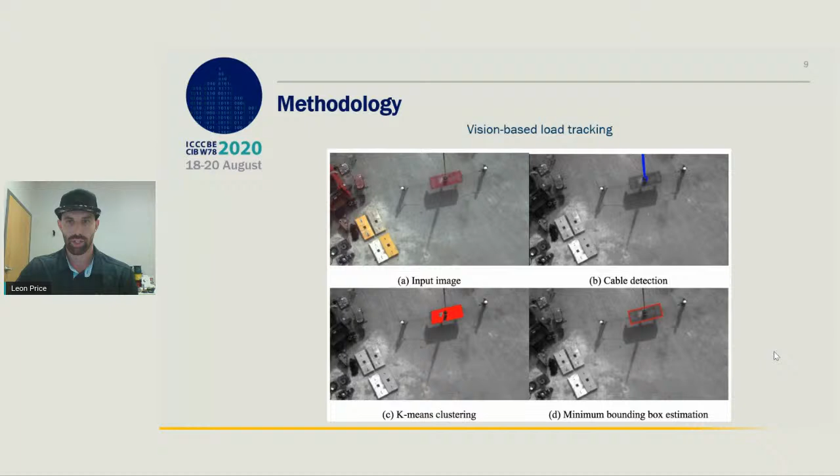The vision system is used to track load sway in order to more accurately model the load position. Intensity thresholding is used to perform cable detection, when k-means clustering and the minimum bounding box algorithm are used.

The vision system simultaneously performs worker tracking on each camera frame. A combination of edge detection, Hough transform, and mean shift clustering is used to identify the workers that are close to the load. Similarly to load tracking, the 2D positions can be projected into 3D for purposes of collision warning.

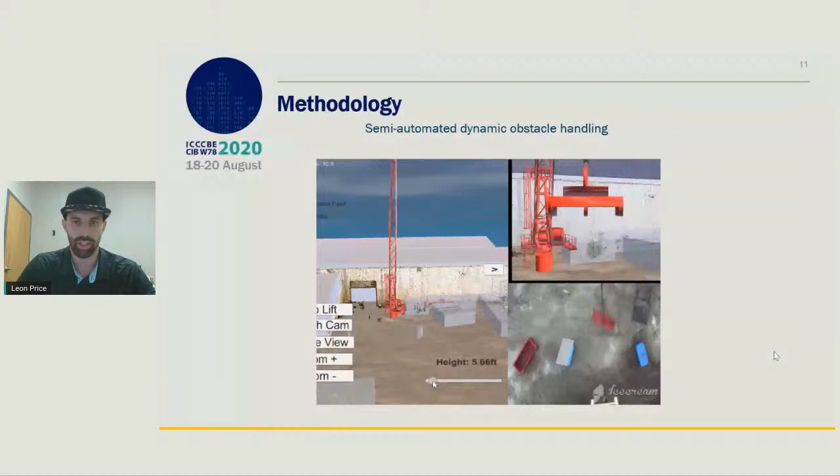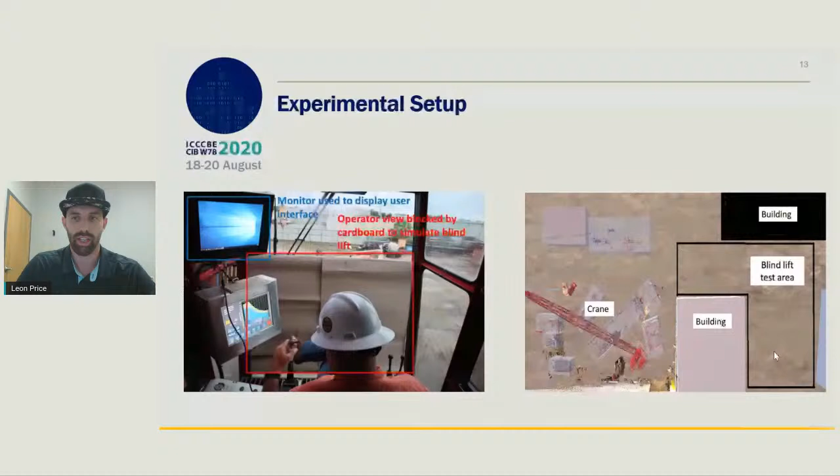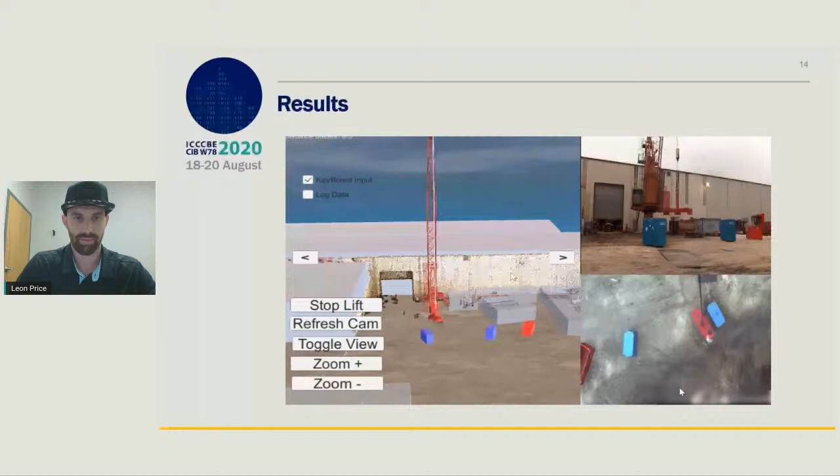Okay, here we go. We then analyze the accuracy of the encoder system based on the height estimation and radius estimation errors. The height estimation has a higher error when the crane is loaded compared to when the crane is unloaded due to the deflection of the boom.

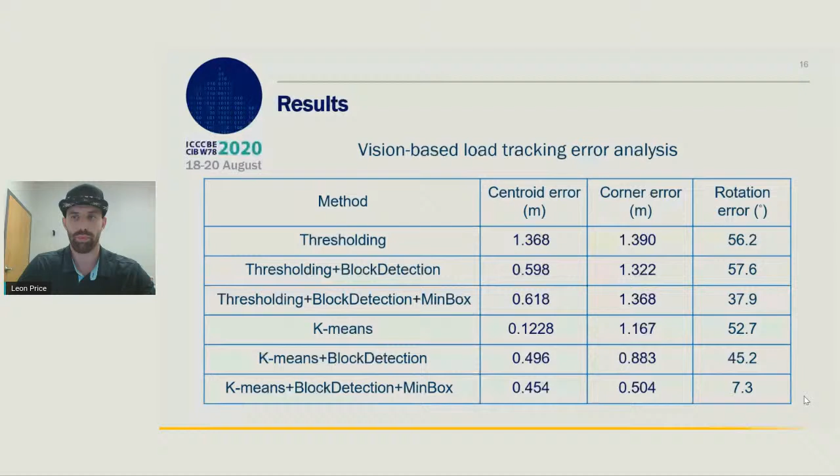However, we were able to reduce the error by applying a statistical offset to measurements when the crane is loaded. We also analyzed the performance of the vision system for load tracking based on the metrics of the centroid error, the corner error, and the rotation error. The results show that the k-means plus block detection plus min-box algorithm had the best performance.

Next, we analyzed the performance of the vision-based worker tracking system based on the metrics of centroid error, precision, recall, and F1 score. The results show that the Hough transform plus mean shift algorithm had the best performance, which is a centroid error of 0.02 meters, 20% precision, 73% recall, and F1 score of 30.

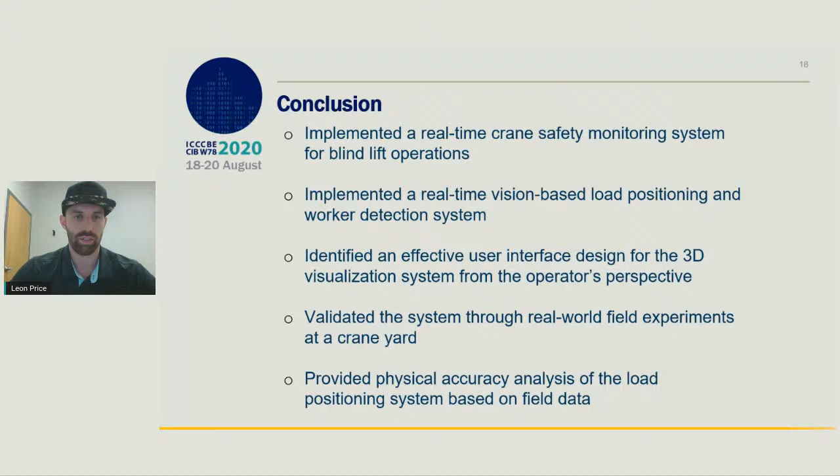In conclusion, we implemented a real-time crane safety monitoring system for blind lift operations, implemented a real-time vision-based load positioning and worker detection system, identified an effective user interface design for the 3D visualization system from the operator's perspective, and validated it in a real crane yard.